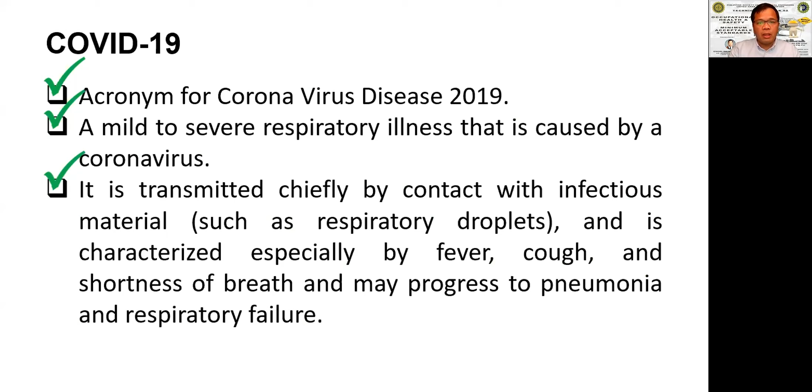I know everyone already knows what COVID-19 is, but as additional knowledge, I want to refresh our minds. COVID-19, an acronym for coronavirus disease 2019, is a mild to severe respiratory illness caused by coronavirus. It is transmitted chiefly by contact with infectious materials such as respiratory droplets in the air, and is characterized especially by fever, cough, and shortness of breath, and may progress to pneumonia and respiratory failure.

Infectious disease is a disease transferable to others by human beings or by animals, insects, foodstuffs, places, or other things and substances contaminated by microbes and toxins of the infectious disease. For this coronavirus, there is no study showing we can get it from animals, but for the sake of the definition, infectious disease is this. It is also known as communicable disease and contagious disease.

False: the new coronavirus only affects older people. The truth is, people of all ages can be infected by the new coronavirus, or nCoV 2019. Older people and people with pre-existing medical conditions such as asthma, diabetes, and heart disease appear to be more vulnerable.

Pandemic. What is pandemic? A worldwide spread of a new disease. An influenza pandemic occurs when a new influenza virus emerges and is spread around the world, and most people do not have immunity.

So currently, as of yesterday, we have 110.8 million coronavirus cases, and so far 2.4 million deaths, 85.7 million recovered. Currently the total infected patients is 22.6 million, with 22.5 million in mild condition, and serious and critical cases around 95,000.

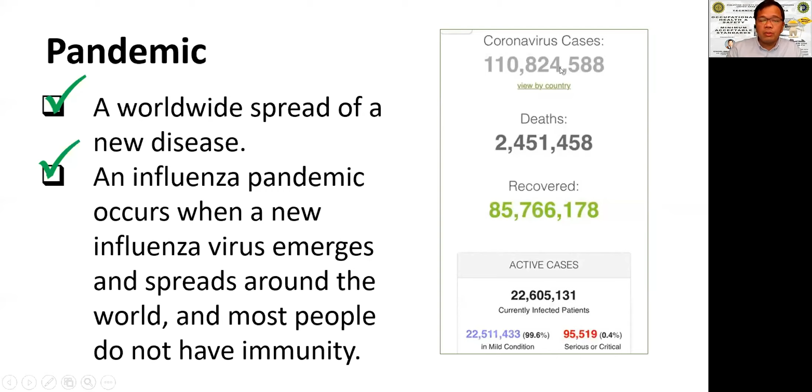So it is very important that we know this, because coronavirus is true, it's not a joke. Some of us may have already gotten coronavirus but don't know it because our immune system is very strong. So always be careful.

Prevention. What is prevention? The outright avoidance of adverse impact of hazards and related disasters. I got this from WHO. False: regularly rinsing your nose with saline helps prevent infection with the coronavirus. The truth is there is no evidence that regularly rinsing the nose with saline has protected people from infection with the coronavirus.

Self-quarantine: to refrain from any contact with other individuals for a period of time, such as 2 weeks, during the outbreak of a contagious disease, usually by remaining in one's home and limiting contact with family members.

Here's an example: Bob was exposed to coronavirus 19 on day 0. On day 5, Bob got tested for coronavirus 19 and the results came back negative. That means he was exposed from day 0 to 5, and got a negative result on the test. On day 8, thinking he did not have COVID-19, Bob went to work and a family gathering. He was contagious on days 8 and 9, 48 hours before symptoms, and exposed 22 people. On day 10, Bob became symptomatic and tested positive. So imagine, from day 0 to day 10, only then were symptoms seen.

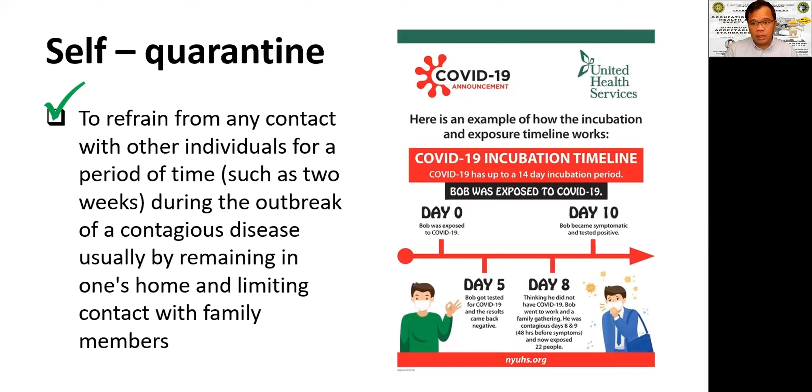Incubation: the incubation period of COVID-19 disease is between 2 to 14 days. This means that if a person remains well 14 days after contact with someone with confirmed coronavirus, they have not been infected. So after 14 days, if you did not get any symptoms, that means you are not infected.

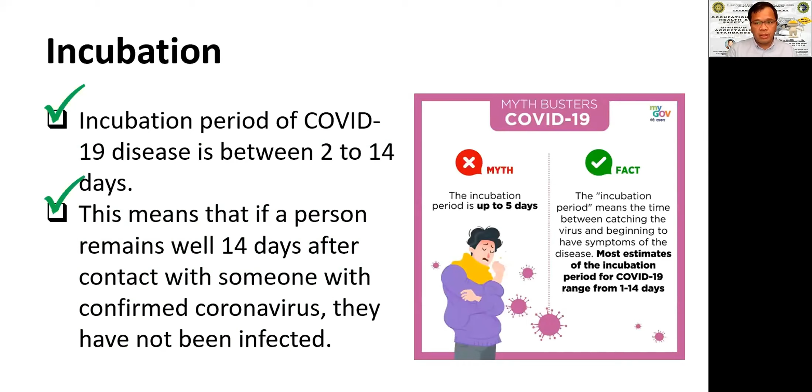False: the incubation period is up to 5 days. The truth is, the incubation period means the time between catching the virus and beginning to have symptoms of the disease. Most estimates of the incubation period for COVID-19 range from 1 to 14 days.

Transmission of the virus happens person to person, between people who are in close contact with one another within about 2 meters, through respiratory droplets from coughing, sneezing, or speaking. It enters our body by inhaling it or through our hands, since we touch our nose, mouth, and eyes - the points of entry. So if you protect your mouth and nose, you will not get the coronavirus. But sometimes we become too relaxed because we don't know if the person in front of us has coronavirus, and that's how we can get it.

So let us continue and check what else is in this presentation.

False: COVID-19 is an airborne disease. The truth is COVID-19 is not airborne and is mainly transmitted through droplets generated when an infected person coughs, sneezes, or speaks.

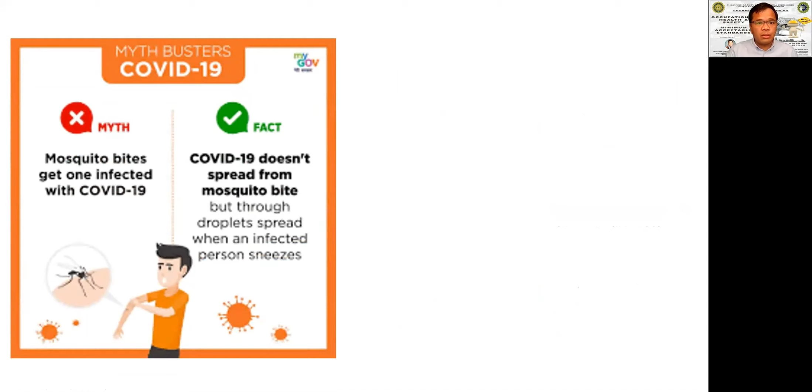False: mosquito bites get one infected with COVID-19. The truth is COVID-19 doesn't spread from mosquito bites, but through droplets spread when an infected person sneezes or speaks.

False: I can catch COVID-19 from my pet. The truth is, while there has been one instance of a dog being infected in Hong Kong, to date there is no evidence that a dog, cat, or any pet can transmit COVID-19.

The common symptoms of COVID-19: fever, around 99%, meaning almost 100% of patients have a fever. Fatigue, where you feel you don't have any energy, is present in 70% of cases.

A dry cough occurs in 59% of cases. Sometimes you feel coughing with a dry cough, meaning you don't have any phlegm inside.

Loss of appetite, wala kang ganong kumain, is at 40%. So you can still eat, but 40% of your appetite is lost.

Body aches, masakit ang buong katawan mo, para kang natrangkaso, is at 35%. You feel pagod na pagod ka, masakit ang katawan mo.

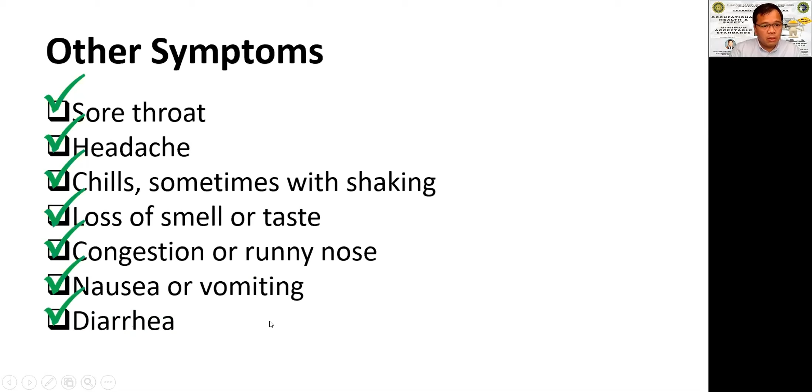Congestion or runny nose, meron ka rin ganyan. Nausea or vomiting and diarrhea - why do you have diarrhea? The coronavirus goes to your stomach, multiplies there, and you get diarrhea.

There are emergency symptoms as well, which I prepared: trouble of breathing. If you get trouble breathing after having the symptoms I mentioned earlier, that is an emergency symptom.

Constant pain or pressure in your chest, blue lips or face, sudden confusion - if you feel or find someone with these emergency symptoms, you need to call emergency services right away if you have one or more of these COVID-19 symptoms, and follow their advice.

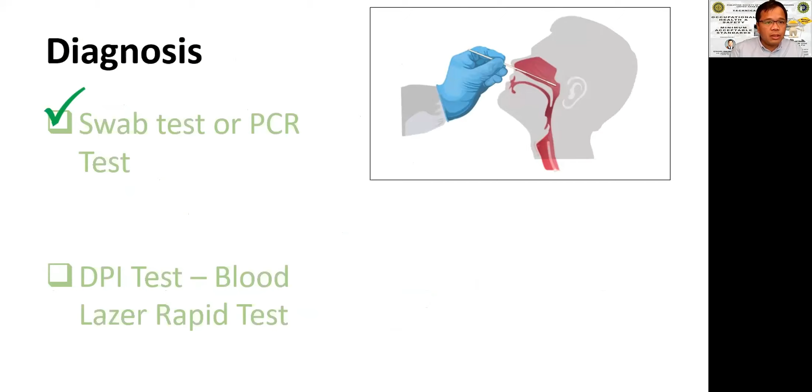Diagnosis for COVID-19 includes the swab test or PCR test, and the DPI test or blood laser rapid test. Is there anybody here who got one of these tests? I got all of these tests, so I have experience with them.

This is only the treatment that's available, but it's not 100% guarantee - even if you get vaccinated, you can still get COVID-19. Vaccinations available now are Pfizer, Moderna, Sputnik from Russia, Sinopharm from China, and AstraZeneca.

Ask your physician what is the suitable vaccine for you if you want to get vaccinated.

And of course, we have our immune system - it can fight all types of sickness. So we need good nutrition to boost our immune system.

Like with cancer, there is also treatment, but it's not 100% that you will heal. Radiation is only a treatment, but not a guarantee you will get rid of cancer cells in your body. It's only by chance - of course your immune system works together with treatment, and then there's a chance someone will survive.

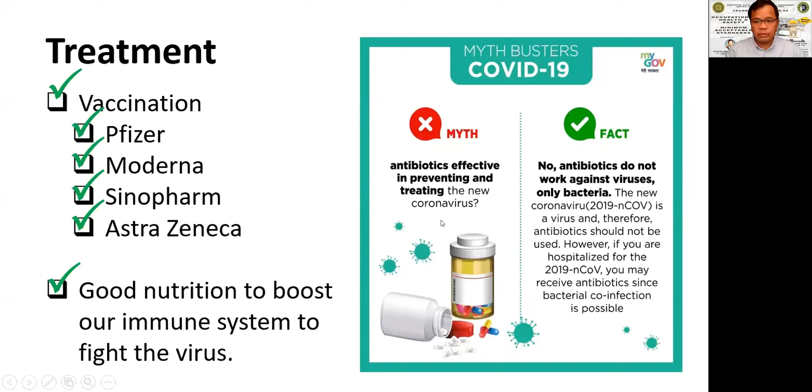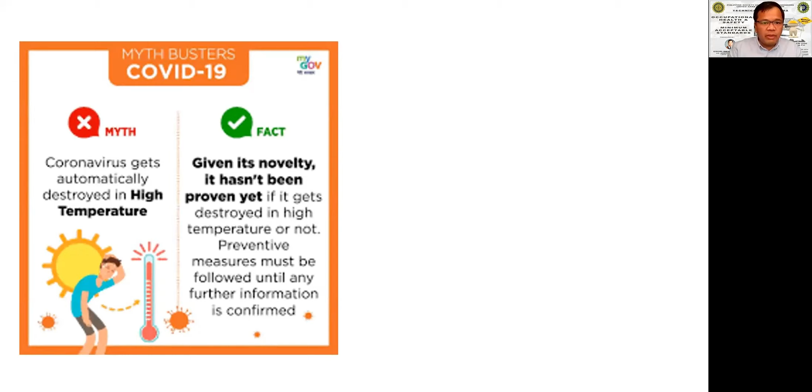Coronavirus gets automatically destroyed in high temperature. That is false. The truth is, given its novelty, it hasn't been proven yet if it gets destroyed in high temperature or not. Preventive measures must be followed until any further information is confirmed.

Preventions. Construction companies or any organizations should develop an emergency management plan for coronavirus and risk assessment. In the risk assessment, you discuss what hazards you will get, how you or your team will get the coronavirus, and then develop control measures based on that risk. If I get another chance to present here in the PSME, maybe I will make a separate risk assessment tutorial.

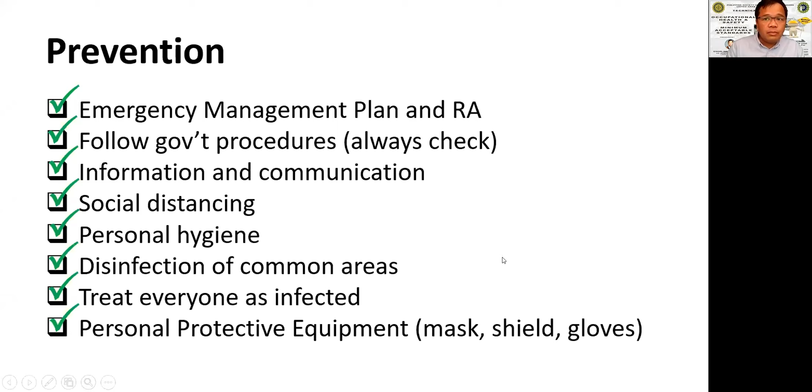Here are some of our practices that I want to highlight - some of our practices in the labor bus.

We follow government rules by reducing the capacity of the bus, making laborers alternate seats, holding meetings outside with a much smaller number of people, and in the mess hall - previously these tables had a capacity of around 10 persons, and we reduced it by more than 60%. We also implemented staggered duty - previously we had one shift only, and now we have 3 shifts: early shift, morning shift, and evening shift, to reduce the number of workers on site at any time.

We also developed isolation measures to control people outside during food distribution, and we now distribute food as packed lunches.

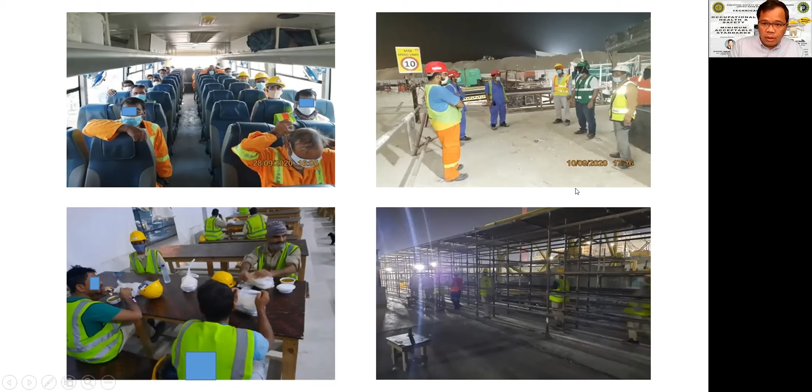So we transferred our meeting room outside, and we communicated to all the supervisors and engineers at site regarding the prevention of the virus. Very important is your participation in controlling the laborers. Imagine your laborers is not so...

How to prevent this, and sometimes they are ignoring it because they think no one sees, but only some people can see. If you compare the coronavirus to an accident, maybe they have fear about the accident, because if they saw a finger cut with blood, at least this is visible to them, but the coronavirus they cannot see. So it's very important that the supervisors and foremen participate and are engaged in controlling the labor.

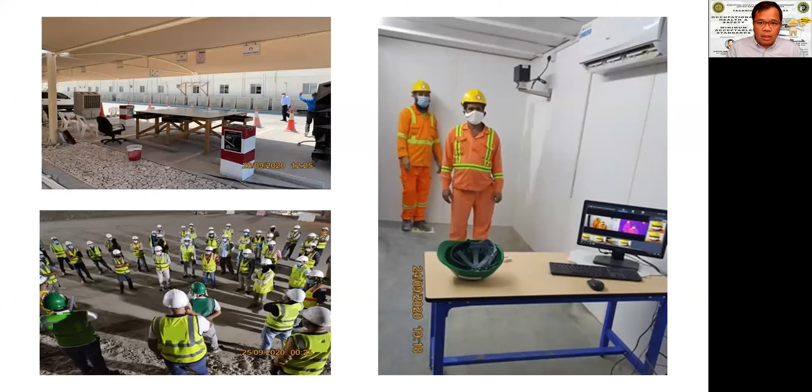So we provided thermal scanning. Every morning or every shift, before entry into the site, they pass through this thermal scanning, like a video thermal scanning.

We also provided isolation rooms. For those persons with high elevated temperature, we immediately isolated them in the isolation room so we can observe their condition, and then we call the emergency contact number for the government regarding this patient, if we have one.

So disinfection and cleaning of the mess hall regularly. If they are in the rest area, they can take rest but with a distance. Disinfection of their buses regularly, so we need to consider this, and disinfection of the offices and site projects.

Educating them to dispose of only their used surgical masks in the proper skips with proper signage, because once someone touches their contaminated PPE, they will also get coronavirus.

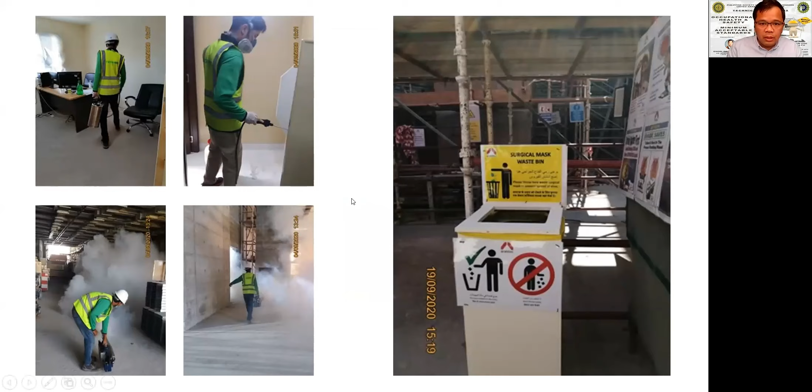So removing the finger scanning for time in and time out, and implementing facial recognition for time in and time out for the laborers and staff.

Provision of liquid disinfectant in common areas at the entrance, and provision of sufficient hand soap for the laborers' washing area, cleaning and disinfection of their mess hall and washroom.

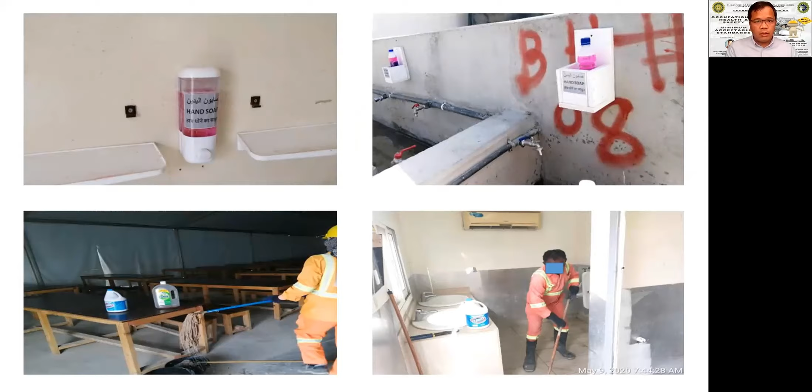Signages are one of our campaigns, so that everybody is reminded. This is a subliminal indoctrination - every day the workers see the signage, they put in their minds the proper procedures in preventing the coronavirus.

So we are placing these on the notice boards at the sites, and also on the common access areas for the laborers.

We must keep protecting each other. Stay alert, control the virus, save lives by washing hands, wearing a face mask, and social distancing. If we strictly follow these three things, I think we can fight together against the coronavirus.

Guys, I prepared some material coming from YouTube from the University of Sydney. I will play this one. Please watch this.

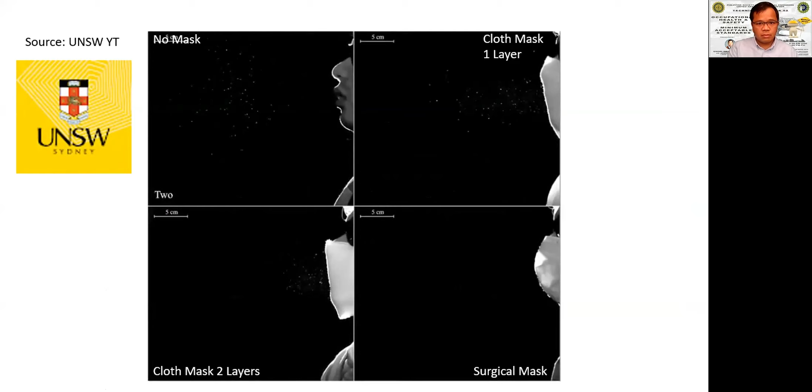As you can see, our respiratory droplets in the air - if you don't have a mask, or one layer of cloth, and two layers of cloth on the left down. And if you are wearing a surgical mask - I'm not promoting the surgical mask, you can also use N95 or any other type of mask - but this is some study that they have done.

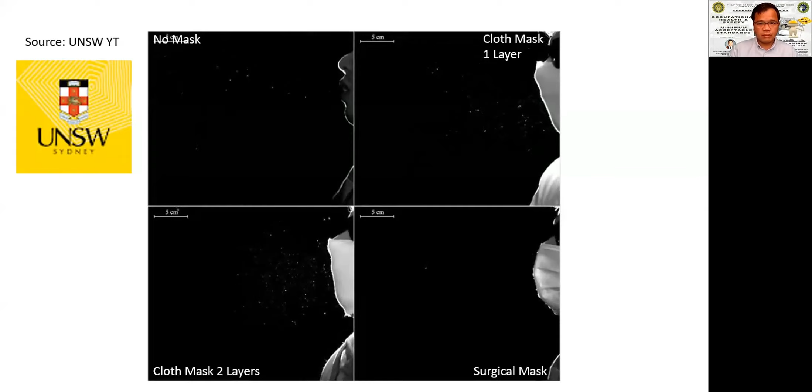When people are sneezing: no mask, cloth mask two layers, and with the surgical mask - this is how the behavior of our respiratory droplets in the air looks. So even when we are wearing a surgical mask, it's not 100% - we cannot contain all the respiratory droplets.

Another video showing how the coronavirus will spread through our hand.

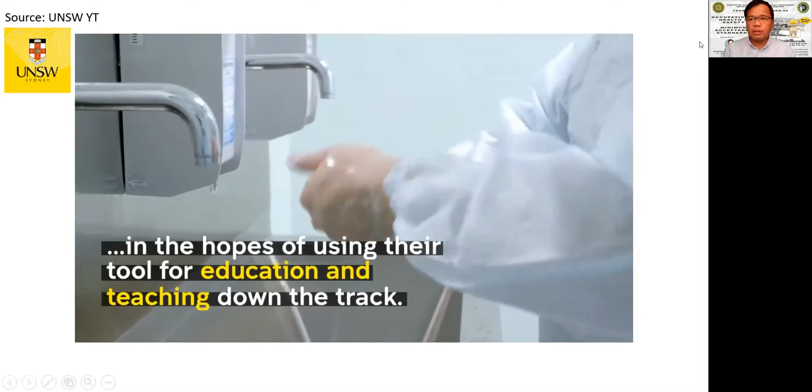There is always a saying, prevention is always better than cure. Guys, if you have questions for the first topic, please drop your questions there.

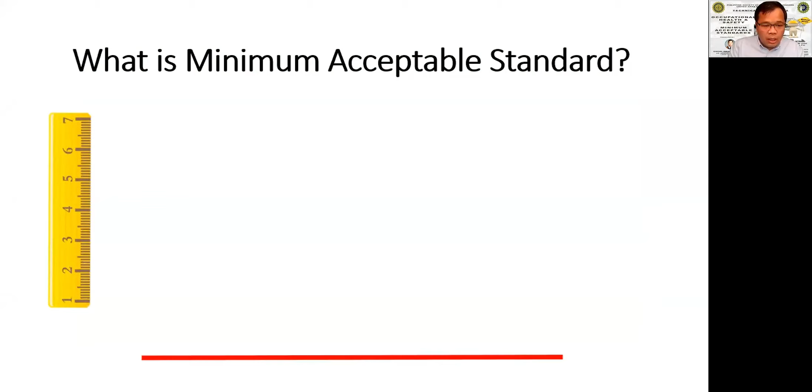Now I want to start immediately with the minimum acceptable standards. What is minimum acceptable standards? Let's say I have 3 lines here: the red color is non-compliance, the blue color line is legal requirements, and the green color line is best practice. Our minimum acceptable standard is somewhere between the legal requirements, above the legal requirements, up to best practice. When we are complying with the minimum acceptable standards, we are sure that we are complying with the legal requirements.

Either the minimum acceptable standard also can be the best practice. So if you are a main contractor, make sure that you are complying with the minimum acceptable standards. But mostly the consultants, consultant and client, they want the best practice. When we are aiming something, we need the best. And even if we did not hit the best, at least we are still complying with the legal requirement.

But for the sake of safety, because we are protecting the lives of our people, so there's no limit. So if you want the best practice, that is better. But on this tutorial, we will just discuss the minimum acceptable standards based on the empirical and local and international legislations.

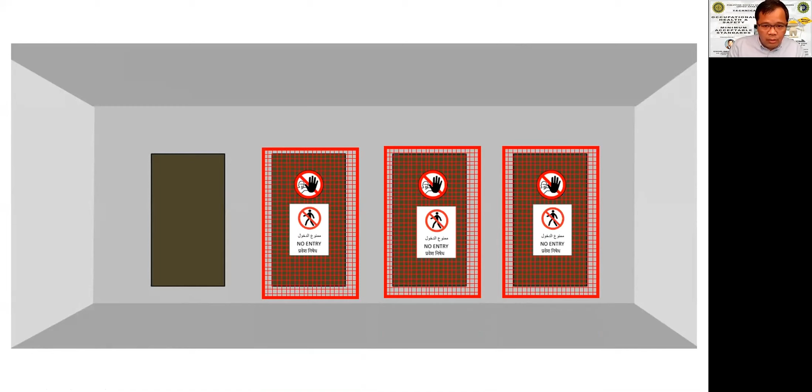So this is I make some sketch for the lift shaft on the building during construction. So this is some technique on how we can close the lift shafts, and if we open it, we need to make sure that we also close it after use.

Risk associated with the lift shaft opening must be managed by carrying out a suitable risk assessment and implementing the necessary control measures. So it's self-explanatory.

Lift shaft opening must be securely closed from floor level to ensure that no person or materials can fall into it. The enclosure shall be tamper-proof and will be installed upon striking of formworks, completion of the shaft walls at each floor level. So when we completed the shaft and we are striking the formworks, or even there is a formworks, we need to provide temporary protection.

This is to make sure that persons, workers around the lift shaft are protected. And there must be a permit system for removal. So when you are removing the cover protections, there should have a permit system. And all works to be undertaken inside the shaft must be controlled under the permit system only.

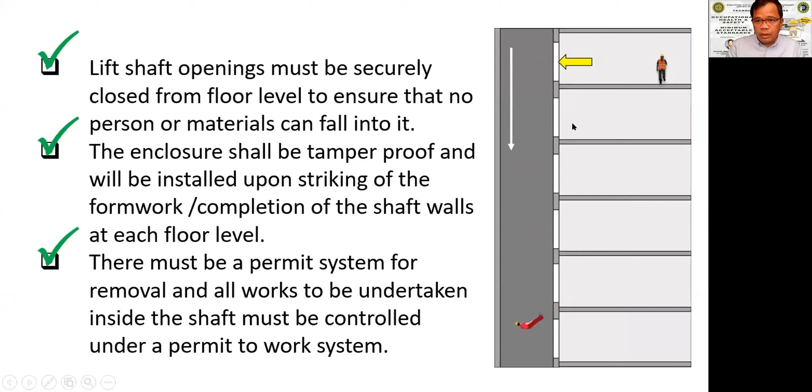Lighting must be installed at every opening level. The lift shaft must have adequate signage identifying the lift shaft area and inherent danger. So we need to put the signage that this is the lift shaft and what are the dangers on this lift shaft.

Where necessary, protection systems must be installed from fully boarded working platforms prior to installation of the lift car. So lift car, MEP, they know it. What is lift car? So before we started to install the lift car, make sure that there is a fully boarded platform on that shaft, on that particular level.

One trade must not work above another in a shaft, and there must be a minimum of 2 persons in a work group. So always buddy system, and it is not allowed to work on the same elevation. Example, in this animation, there's someone working on the top and someone also working or passing below. This is not acceptable. Only one group at a time.

That's why it's very important that when you are working on the lift shaft, you need to close all the points of entry. And if someone wants to work together with another group, they should make a risk assessment and make sure that the risks are fully controlled with full competent supervision.

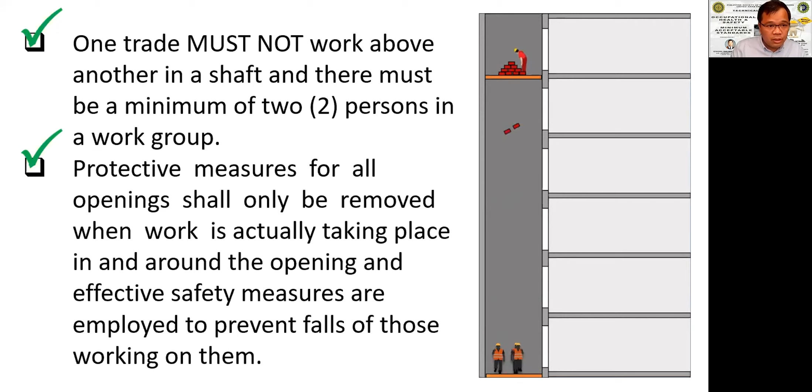During the installation of the lift equipment, the temporary protection is to remain in place until the permanent doors are installed and secured. For example, you are doing the job inside the shaft, installing the lifting equipment, and then leaving at the end of the shift. So when you are going to lunch break or other breaks, you need to make sure that when you leave that place, it is protected.

Because there are lots of people in the construction site that are not the same as us - they don't know how to analyze it. Maybe they will go inside and sleep during the break time, or hide there, and then that time they will get an accident.

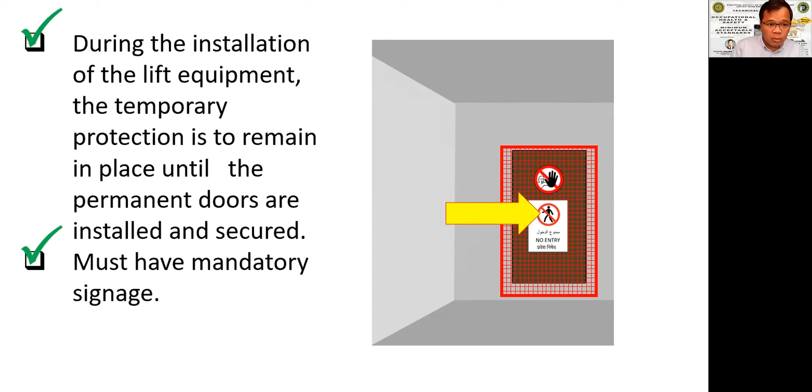There must have at least a mandatory signage. Mandatory signage should have 3 different languages: the local language of your host country, the English language, and the common language of the workers - for example Hindi, or in the Philippines, Tagalog. You need to identify what is the common language there and make sure it is included. In addition, you need to put some pictures or sketches so that even if they don't know how to read, they can understand the pictures. That is the minimum requirement about the signage and edge protection.

So risers and penetrations - what are those? MEP is very familiar with these risers and penetrations. These are openings where your MEP pipings go up through the floor levels of the buildings. So during construction, and during the installation of MEP, you need to make sure that those risers and penetrations are protected.

For example, here in the pictures, they installed steel mesh made of scraps welded together. They install it together with the concrete, and install concrete blocks on the perimeter of this opening. Also on the right side, you can see how the floor opening is protected. So when you have this, even some workers passing inside - even without you - they will go inside, but at least they cannot fall into the opening.

Even the small opening here, you need to provide protection, because some falling objects may fall through this small opening and hit persons below.

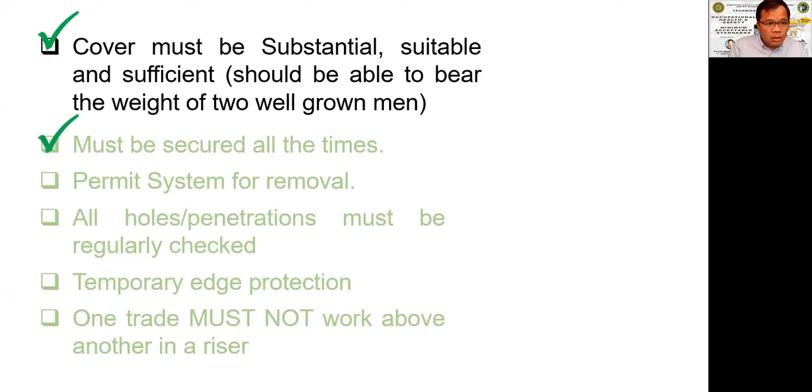The cover must be substantial, suitable, and sufficient. It should be able to bear the weight of 2 well-grown men. So at least your cover is designed to sustain the weight of 2 well-grown men, and must be secured at all times.

The cover or protection system must be under the permit system. That's why when you are working on the construction site, everything there is permit - because this is in order to make sure that we will not forget something. Because when you remove something, at least you provide another control. That is very important.

All holes and penetrations must be regularly checked - temporary edge protections. So you should provide temporary edge protections for penetrations as well, not only for the lift shafts.

One trade must not work above another in a riser. So in the floor opening, you need to make sure that when you are working on the top, the level below your work area is isolated.

If you can provide a watchman to restrict entry or passing by that location, it is better. But sometimes human control has its limitations - for example, if your watchman goes to the toilet, then your human control is not there. So it's always better to have hard barricades and signages, plus the watchman, as the minimum acceptable standard.

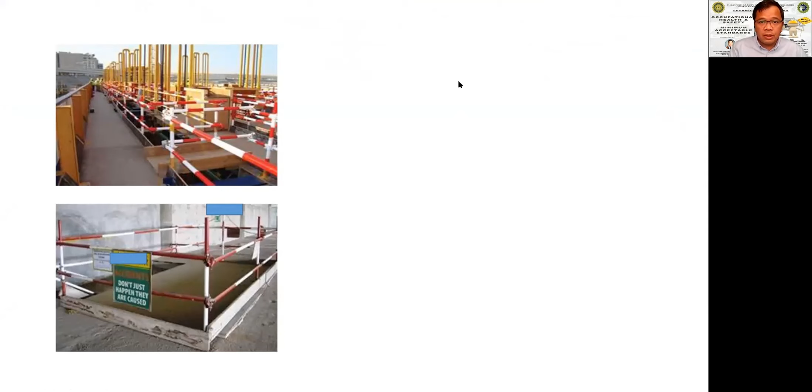So this is some example of good practice on the edge protections, on the opening and the edge of the buildings, on the opening and the floors. Some example of minimum acceptable standards on the edge of the buildings.

And the top rails, when you are installing the top rail, it should be 0.91 meters to 1.15 meters. And when you are installing the mid rail, it should be 0.45 meter to 0.60 meters.

This dimension is developed based on the human height. Okay, human height, toe boards. Minimum height is 0.15 meters or 150 millimeters.

And the edge protection should be installed 0.5 meter setback from the leading edge of the building. And the vertical member of this edge protection, we call it the post or edge protection post.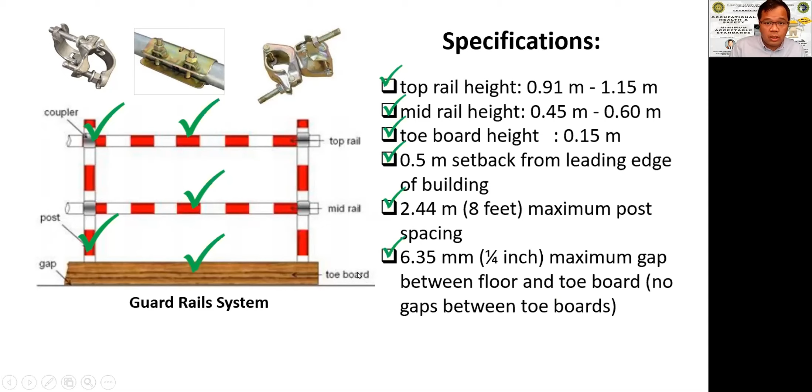Okay, this is minimum acceptable standards. If you want to provide some green or mesh net, it's better - you increase the height by 3 or 4 layers of horizontal pipes and provide the green mesh. That is better, we call it best practice. What I'm trying to discuss here is only the minimum acceptable standards.

So a guardrail system must be capable of withstanding without failure a force of at least 200 pounds, 890 Newton or 91 kilogram force, applied in a downward or outward direction within 2 inches (5 centimeters) of the top edge at any point along the top rails. So your guardrail or edge protection should be designed to resist this force.

This is as per OSHA standards. So for example, on this sketch, at any point on these railings you need to make sure that 200 pounds can be resisted, 91 kilogram force. I think they based this on the weight of people - 100 kilograms or 91 kilograms.

It must be extended around any uncovered opening or leading edges. Must be substantial, suitable, and sufficient. These terms should be complied with at all times - substantial, suitable, and sufficient, meaning very safe. There should be no chance that your edge protection will collapse by itself or by a certain minimum force.

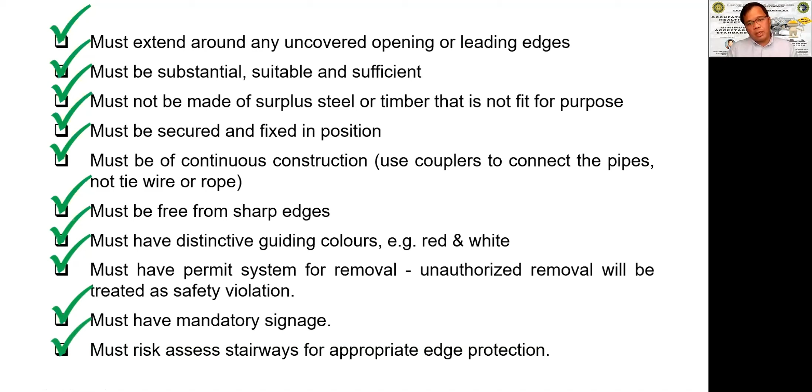Must have a permit system for removal. Unauthorized removal will be treated as a safety violation. Must have mandatory signage as a minimum acceptable standard. If you have edge protection but no signage, you are not complying with the minimum acceptable standard, and you will still get fines from the authority if something unacceptable happens. You must also risk assess stairways - for the staircase or stairways, you should have appropriate edge protections as well.

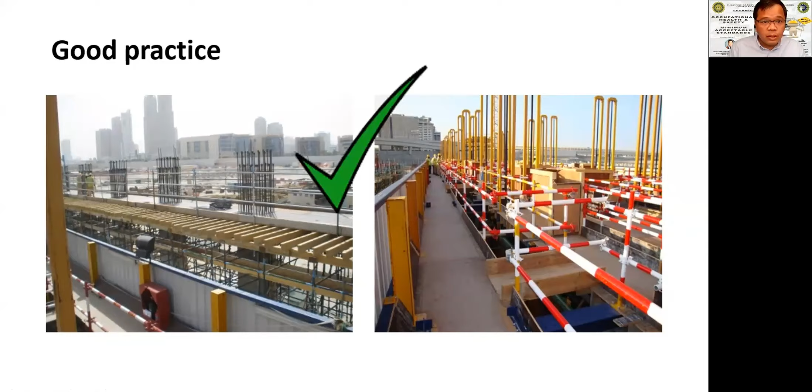Okay guys, we have completed housekeeping. Let's proceed to temporary electricity supply. This is also MEP works.

Just hang on a minute, I just want to drink a little bit of water.

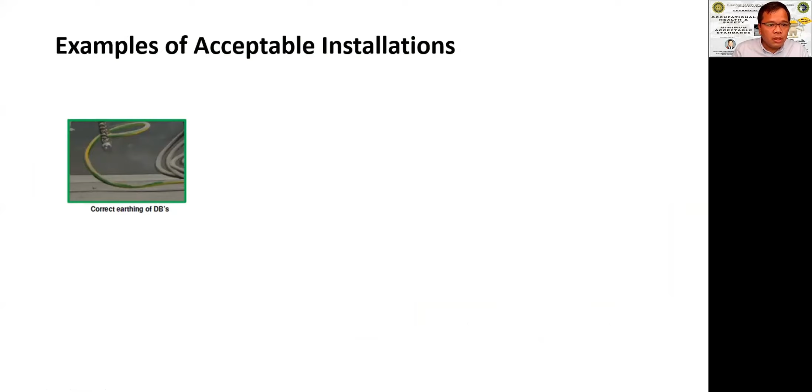Examples of acceptable installations: correct earthing of the DBs, correct cable glands, which protect our cable from damage from sharp edges, and additional control of your distribution boards with provision of padlocks so you can prevent unauthorized access.

Guys, it's very strict here, especially in the Middle East. You are not allowed to touch any electrical equipment if you are not competent. When we say competent about electricity, you should be trained. You should have education about electricity, not only training, like for example a master electrician, and you should have experience.

For example, one worker wants power and cannot find any electrician nearby, and doesn't know the number to call. So what will they do? They will open the distribution board and insert their cable by themselves. When opening distribution boards, they are prone to accidents.

Fluorescent lights: we can use fluorescent lighting with a diffuser on the aisles of our project. Make sure all the cables are properly elevated and installed, and there is full discrimination of the circuits, so there's no twisting and everything is well organized and tight.

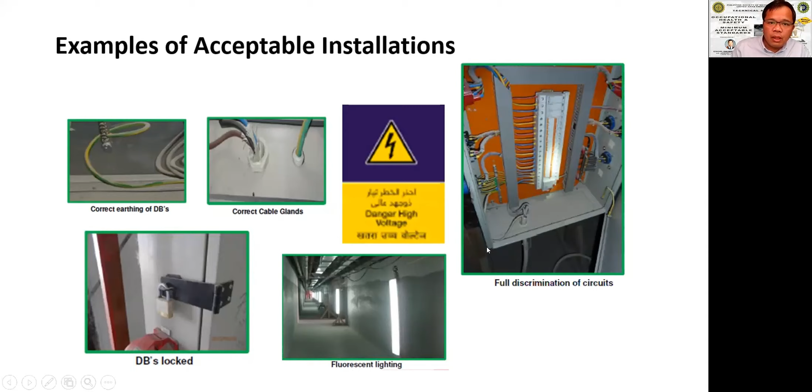And as I said before, even if you provide everything, if you don't have signage, that's a problem. This is a minimum acceptable standard, even in the law, that you should always provide signage in at least 3 different languages, with pictures or sketches.

So temporary electrical installation must be designed. Just a minute, I just want to hide this. It must be approved by an electrical engineer, installed by a competent electrician, and inspected by a competent person once every 3 months.

So this is design approved by an electrical engineer, to avoid overloading.

I know MEP knows what is approved electrically, but why do we need the design? Because every time we have new equipment that needs to connect to our temporary electrical system, we need to coordinate with the electrical engineer, so he can evaluate if the new load can be allowed to connect to the existing electrical system.

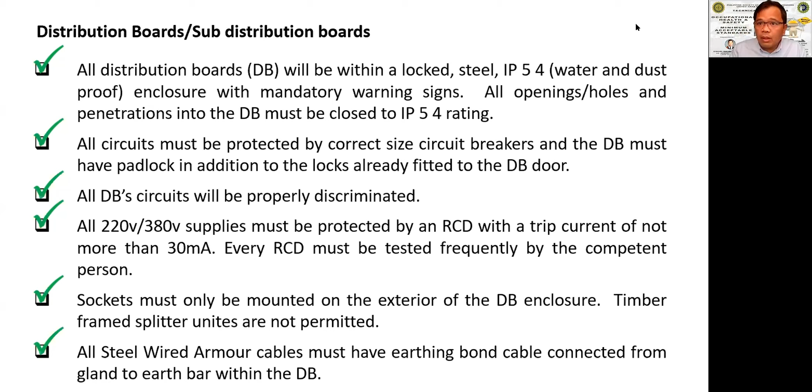Cable and flexes: all cables shall be terminated using proprietary glands. Where necessary, separate earth conductors shall be installed. So even your cables should have an earth conductor.

All extension leads shall be formed using 3-core double insulated flex. Flexes must be kept off the floor and secured by non-conductive cable ties where required. All earths will be terminated properly to ensure the safety of the system - if there is a loose connection, it is always making sparks, and if there are sparks, it creates a fire.

Joints must be made using outdoor type plugs and sockets, no twisted or taped joints. Outdoor type plugs or sockets are required because during construction there are so many things happening on site - there is water, there is temperature, because the site is still exposed to all types of weather. So we need to make sure we are using proper outdoor plugs, sockets, and proprietary junction boxes.

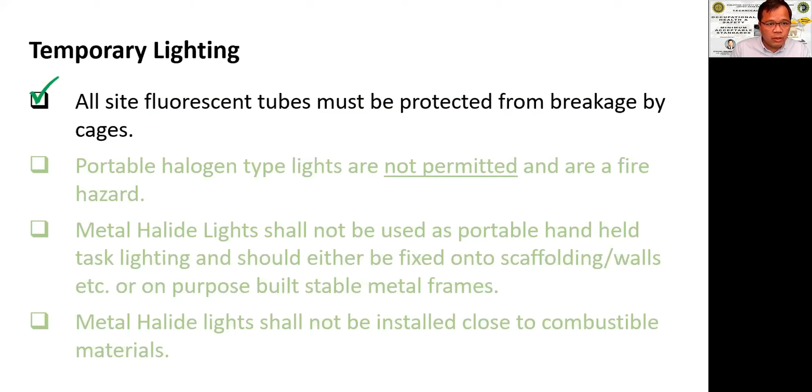Temporary lighting: all site fluorescent tubes must be protected from breakage by a cage, so we need to provide a cage if we are using fluorescent tubes. Portable halogen type lights are not permitted and are a fire hazard - halogen is not permitted.

Metal halide lights shall not be used as portable handheld task lighting. Task lighting is different from metal halide lights. Metal halide lights should be installed only permanently on fixed locations to give lighting to our work area or aisles. But task lighting that we can move everywhere should be provided.

Metal halide lights shall not be installed close to combustible materials because they emit heat as well. Now they are providing LED lights, but I have one incident even with LED lights. You know what workers did? They removed the lights from the fixed location and used them as task lighting. Then after completing their task and shift, they placed it on the platform and shut down the DB. The issue is when the new shift arrives, they open the system and the light is on. Due to the heat emitted by the LED lights, the planks or platforms burn. Fortunately the planks were treated fire rated, but it still smokes, which you can detect from far distance. But if it's not treated fire rated, then it's a big disaster of fire. So always make sure that all lights are away from combustible materials.

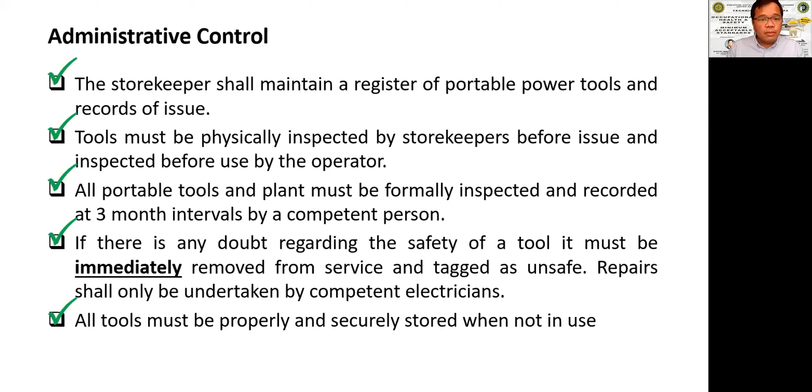Plug and flex: all tools must have an industrial plug fitted and be the correct color for the voltage. Electrical engineers know the correct color for the voltage. For example, on site, yellow flex indicates 110 volts, so you can easily see he is using 110 volts. You can also see the power tool's yellow color socket, confirming it's 110 volts connected into the 110 volt supply. But sometimes workers make their own remedy.

They are removing the lock on the industrial type plug so that they can insert their 110 volt power tools into the 220 volt supply. This is an unsafe act and not acceptable. The plug and cable shall be in good condition with cable securely terminated.

Only one flex for each plug socket, no doubling up. As I discussed before, only one plug, one socket. Cables and flexes must be kept off the ground and out of the way during use.

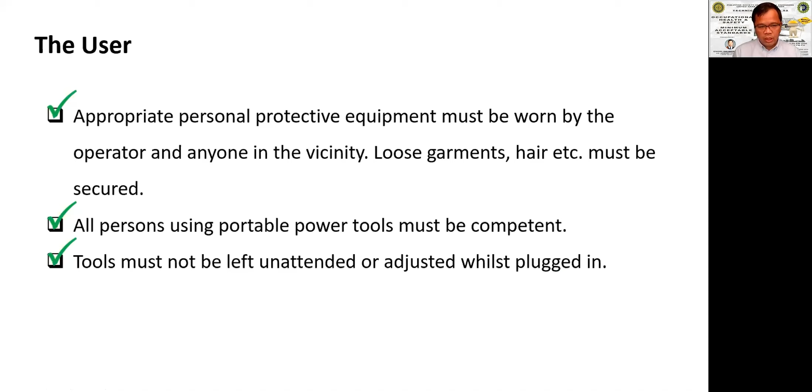Tools must not be left unattended or adjusted whilst plugged in. Sometimes workers go for break and forget to remove the tools from the sockets and put them in the toolbox properly. This is unacceptable, because someone unauthorized could use it while they were away, and those unauthorized persons could get into an accident.

The workpiece must be secured properly in a vise, workbench, or other similar device wherever possible, or positioned so as to prevent movement. When you are cutting something, at least you should have proper workstations, like table stations. Workers sometimes say, 'sir, this will only take one minute, I'm just cutting this' as an excuse, but I will tell you, accidents happen in less than one minute.

Any accident happens in less than one minute, so don't allow that. I will do it properly all the time. Your workstations should be designed to carry out your job safely.

If you are cutting bolts for ducting materials, you should do it properly in a vise or workbench or other similar device wherever possible.

The environment as well. Electrical tools must not be used in hazardous locations, like confined spaces, unless designed for it, and must be kept dry. Inside a confined space, you cannot use all types of electrical tools. You need to consult the supplier of your tools if it's suitable to work inside a confined space, because there may be flammable gases, and your power tools will create sparks.

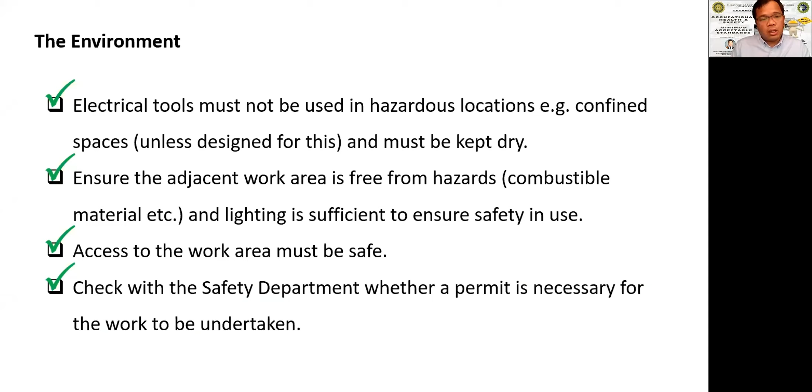Sometimes workers doing grinding remove the PPE. That is the attitude - there's no self-discipline. And then it's too late - they get into an accident before they realize they are not complying. They have the equipment but they're not using it. As supervisors and engineers, we need to make sure all our people are properly using the safety provisions we provided to them.

If they're not using it, we can ask them why and listen to them. They might say, 'Boss, I cannot work properly.' So this is the time you need to analyze if you can change the system or the procedure, so that your workers are 100% safe.

Minimum requirements: more onerous legal or contractual requirements shall always take precedence. If you think your minimum acceptable standard is below the legal requirements of the host country you are working in, increase it. This minimum acceptable standard is only a guide, so you can still bring it up to best practice to make sure you eliminate the unsafe conditions and unsafe acts that trigger accidents on site.

Higher standards shall be adopted wherever practicable. So if it is practicable, adopt the higher standard rather than just the minimum acceptable standard.

Gas cylinders are a convenient way to transport stored gas under pressure. These gases are used mainly on a construction site for typical operations like soldering, welding, and flame cutting. It's very convenient to use.

The main hazards are impact from the blast of a cylinder, explosion or rapid release of the compressed gas, impact from parts of the cylinder or valves that fail, or flying debris like shrapnel. When cylinders explode, they generate shrapnel or flying debris that can hit you, or fire that can burn anyone nearby.

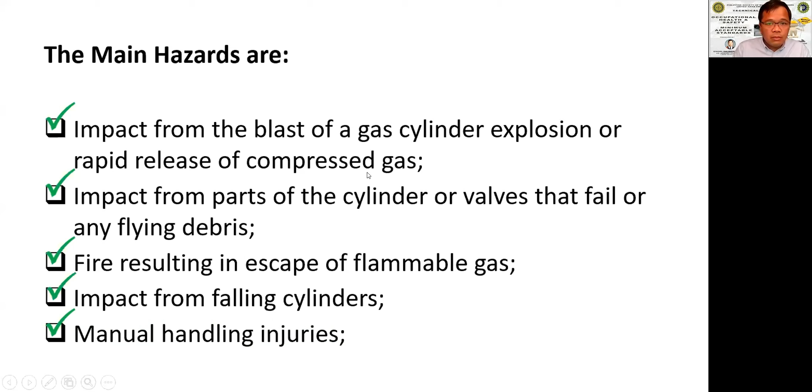There are so many inherent hazards in cylinder handling. These are only the main hazards that you can identify in your risk assessment, and you need to control them at all times. To reduce the risk of failure, you need to know and act on the following precautions.

During transportation, handling and use, transportation of the cylinder must be in a purpose-built gas trolley or lifting cage, and all cylinders must be secured by chains. If you are MEP, you are familiar with the trolley. I will show some pictures of the trolley later.

No one must lift a cylinder by the valves using a web sling or chain. You cannot lift it by crane or web sling. Never manually spin the cylinder to transport it from one place to another over a short distance. This may cause the cylinder to fall and trip. Imagine when your cylinder falls, it will hit the valve or something, and it will explode.

Cylinders must never be dragged or rolled. Transportation of the cylinder must be in a purpose-built gas trolley only, or lifting cage, and all cylinders must be secured by a chain. Gas cylinders must not be raised or lowered on the forks of a lift truck.

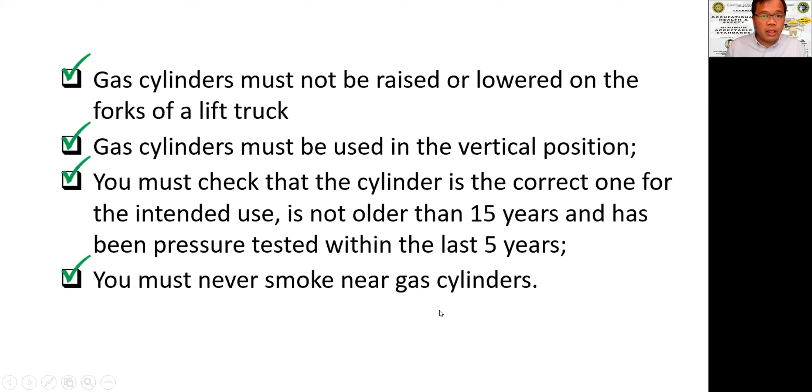You must never smoke near gas cylinders. Correct, very clear. Storage: cylinders must be stored out of direct sunlight to prevent potential rupture due to heat explosion. If there is extreme heat weather, the gas inside the cylinders will expand more, and the pressure will increase, and it will rupture the cylinder shells.

The storage area must have a level concrete base, and the walls and roof to be constructed of non-combustible materials, and must not be in a building used for other purposes. Ventilation must be available to keep cylinders cool. Warning signs must be placed in prominent positions to warn others in the vicinity.

So this is the storage. It must be on a level concrete base, and must not be in a building used for other purposes. If you are storing cylinders, you need to build storage intended only for compressed gas cylinders.

And of course, you should have ventilation so that the temperature is controlled on that location. As a minimum, warning signs should be placed and visible, and the signage should have a minimum of 3 different languages with photographs on it, so that even workers who are not well educated and don't know how to read can understand that this location is a restricted area and know what the hazards are on that location.

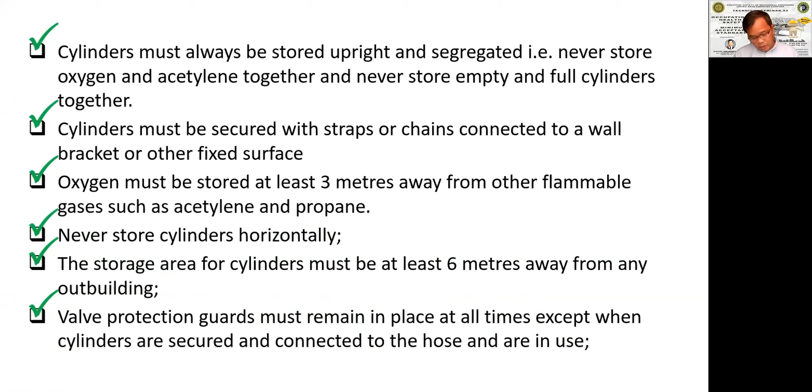So when you are planning to bring cylinders, because you have so many jobs, steel jobs, you need to make proper planning on how you will store your cylinders. When installing and storing the cylinders, make sure the area is suitable and safe, with no underground utilities like power lines, because if there is an earth leakage on that location, it will contribute heat to your cylinders, and if you have leaks on your cylinders, it will explode.

Fuel hose. Fuel hoses must be inspected for signs of cracks or perishing and removed immediately if found. You can see outside so many hoses - when you bend it, there are already cracks.

No, it's not brittle because it's carrying the pressure inside. This inspection must be carried out daily before use. Fuel hoses must not be used if there is no flashback arrestor fitted at the regulator and torch end.

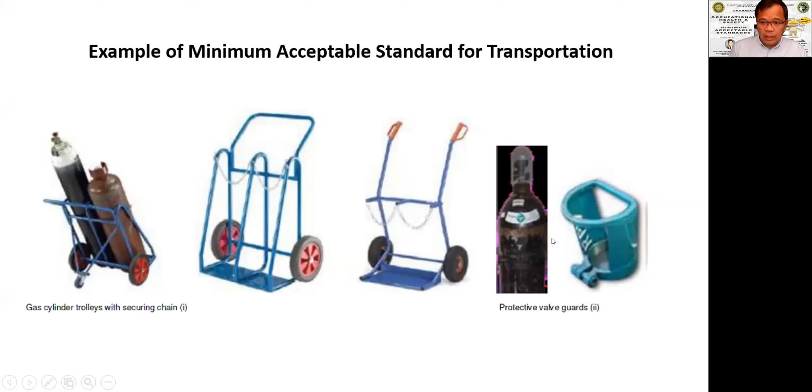So we have completed the compressed gas cylinders. Now we will proceed to the ladders and step ladders. Is there any questions so far? Later on I will answer, so please collect the questions. Minimum requirements for the ladder and step ladder.

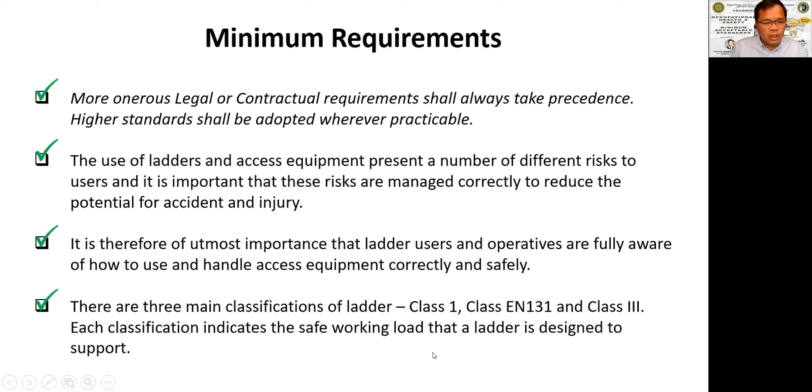The three main classifications of ladder are Class 1, Class EN or European 131, and Class 3. This classification indicates the safe working load that a ladder is designed to support. The table shows the three main ladder classifications.

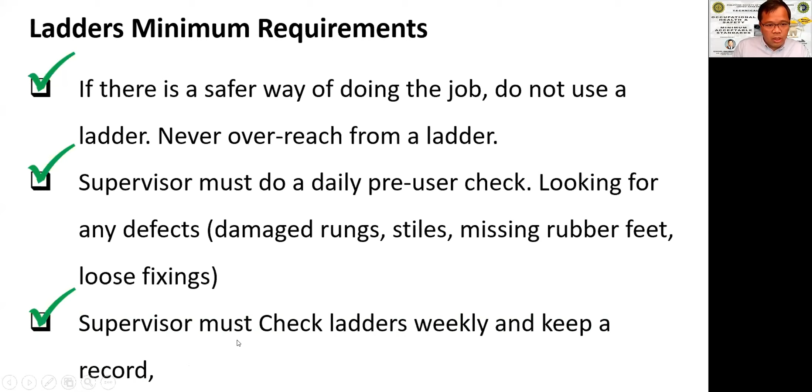Supervisors must check ladders weekly and keep a record. It is always very important that you have a record of checking the ladders. This will save yourself in the future if something happens, for investigation purposes, and also for audit inspections. So you should have this record, and of course, as supervisor, you should know how to inspect the ladder properly.

Supervisor must give workers instruction on how to use the ladder safely and make sure they are followed. You give instruction, but you did not monitor them. So how do you make sure that they will not get an accident using the ladder? You need to make sure that you are supervising them, that they are following your instruction on how to use the ladder safely. Mostly accidents happen on site due to unsafe acts, the behavior, the attitude of the workers. So you need to control those bad attitudes.

Sir, I'm using this ladder 10 years now, you don't need to teach me, okay guys. But when you observe how he is using the ladder, it's very unsafe. So that means he has 10 years working experience with the ladder, but it's not correct experience. As supervisor, you need to check, you need to correct this. Don't trust everything to your labor, okay.

Supervisor must check floor surfaces, area level, firm and clean. Surface is very important because your ladder may slip and your worker may fall. Any ladders in poor condition must be removed from the site and tagged unsafe to use.

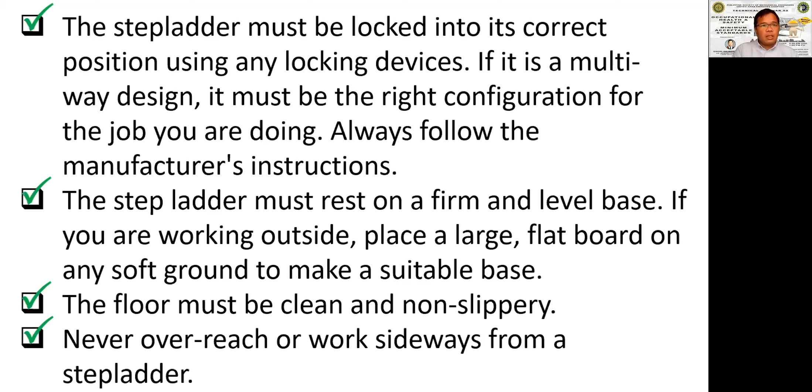Make sure all the steps of your ladder are clear from oils so it will not be slippery. And make sure you have anti-slip safety shoes fit for your ladder. There is rubber with spikes on it so that it will not slip on any surface.

You need to make sure this is working properly. Most of the time it gets damaged, and some workers even remove it. So you need to make sure there is proper slip-resistant safety shoes on the feet of your ladder.

When you are climbing the ladder, make sure your workers, or yourself, maintain 3 points of contact on the ladder. When installing the straight ladder, the inclination should be 1:4 - 1 meter horizontal and 4 vertical. It depends on the length of the ladder, and the ladder should extend at least 1 meter above the roof or surface, because this will serve as a handle when going in and out of the ladder.

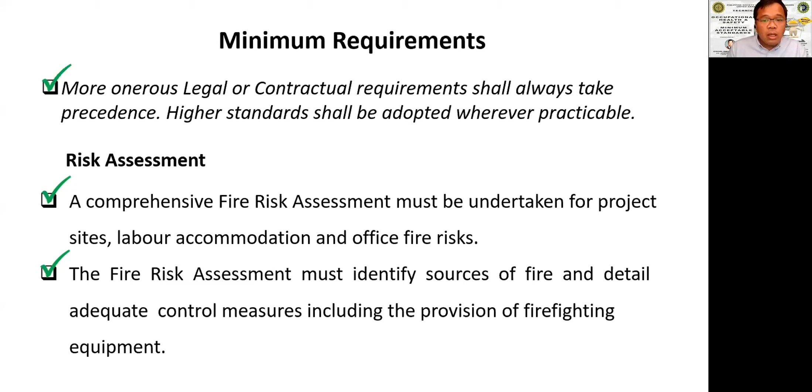As in-charge persons, we need to make sure during the fire risk assessment, we identify all those sources and then provide control measures, and make sure that you are implementing and monitoring those control measures. If you are preparing the method statement, you need to consider the fire risk assessment as well.

It's always required that you identify all the hazards before you start the actual job. Location of the equipment - fire extinguishers shall be distributed in easily accessible locations, and the maximum travel distance from any point of the protected area to the nearest fire extinguisher shall not exceed 15 meters.

Wherever practicable, hose reels must be installed in uniform position near exits or on staircase landings at floor levels. Hose reels not fitted in recesses must be wall mounted in such a manner that they do not form an obstruction to means of escape routes.

As a project manager, review your emergency response procedures so that you can see what is the time that you will install your temporary firefighting provisions. But remember, the fire extinguishers should be there before the start of the job, so it should be sufficient, and make sure that you have a 15 meters maximum travel distance for each point of the site so that you can reach the fire extinguishers.

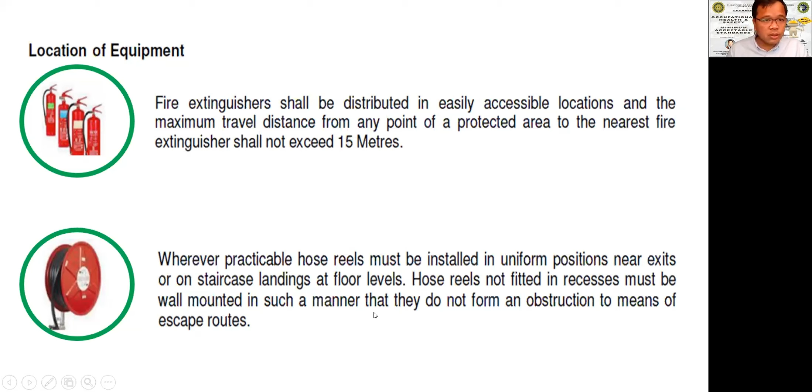Dry risers must be installed at the stairs of each level when the building height exceeds 18 meters. So there is already a provision here that when your building exceeds 18 meters, dry risers should be installed and must be equipped with controllable outlets on each level to be used by connecting fire hoses or hose reels. These risers must be equipped with the correct inlet at ground level for water supply by civil defense from outside the buildings.

Wet risers must be installed when the building height exceeds 30 meters. There must be a sufficient pressurized water supply in accordance with its design and a competent organization authorized by the Civil Defense Administration. So, dry risers, wet risers.

Automatic sprinkler systems must be installed in all basement areas of the buildings which are to be used during the project as storage areas. So if you are using your basement as storage areas, you should have automatic sprinkler systems. That's why when you are bringing materials, like for example lift car accessories materials, because the basement is already completed, you will bring your materials to install your MEP works. Before you bring your material, you need to check that there is an automatic sprinkler system.

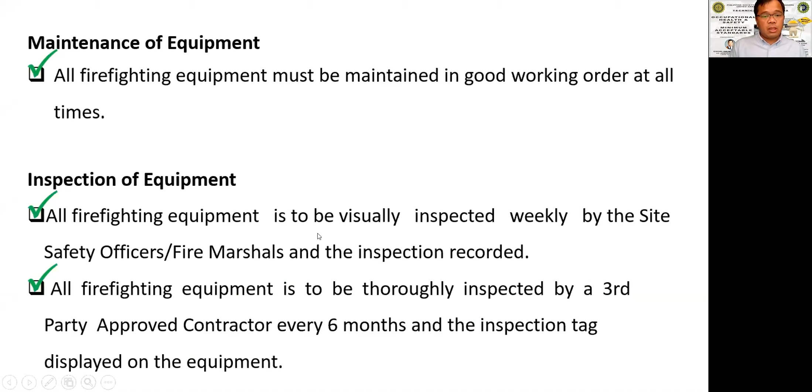Okay guys, any questions so far? This is only highlights for the minimum acceptable standards. I will speak with our professor, Mr. Ryan, Engineer Ryan Ben. We are listening - there are some questions, but I think we need to answer that. There are a few questions right now coming in our chat box.

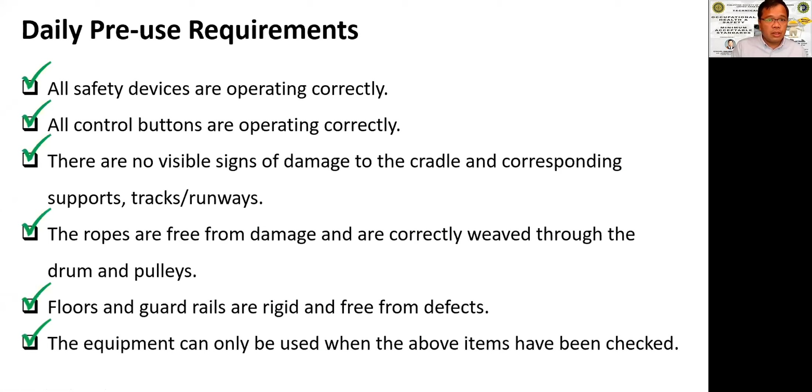Okay, when using the suspended platform, you must ensure pre-use requirements: the equipment shall only be altered and dismantled by competent persons - always mention competent persons, right? Every time the equipment is altered, dismantled, or relocated, it must be third-party certified. The safe working load must not be exceeded.

Again, tools and equipment are secured appropriately. Tool lanyards must be utilized. If you are using tools like a spanner, it should be equipped with tool lanyards. This is to prevent accidental falling of the tools below.

The occupants of the building are aware that they should not be opening windows while the cradle is in use, and no other works must be carried out above the cradle. So who are the occupants of the building during construction? We are the occupants. But if you are conducting maintenance only, then the building owner should be coordinated about your procedures.

The person operating the cradle must know the emergency lowering device and how to use it. If malfunctions occur, work is stopped immediately and reported to the concerned person. An appropriate rescue from height plan must be in place.

When weather conditions deteriorate, wind, rain, etc., work is stopped immediately. Access to the area below where cradles are working must be properly barricaded and signposted to prevent entry of unauthorized personnel.

personnel. How many hours do we have now? Host? So we almost completed.

All persons in the cradle must wear a harness with a lanyard attached to the independent safety line at all times.

The same things apply to the electrical distribution board.

If counterweight style cradle support arms are being utilized, the counterweight plates must be secured and tied with wire to ensure they cannot be removed. The counterweights must be secured by installing jack props between the tops of the counterweights and soffit, or bolting tie support through the counterweight base frames.

I will show you pictures of the counterweight.

I-beam type cradle support arms must be bolted on the floor slab with a supplier approved fastening system. All bolts must be chemically anchored.

There is a chemical that they are putting on the bolts.

Cradles can only be entered or exited from the ground floor or purpose-built landing platforms. So don't try to enter the cradles through the window. Only authorized access is from the ground floor, or if you have a landing platform.

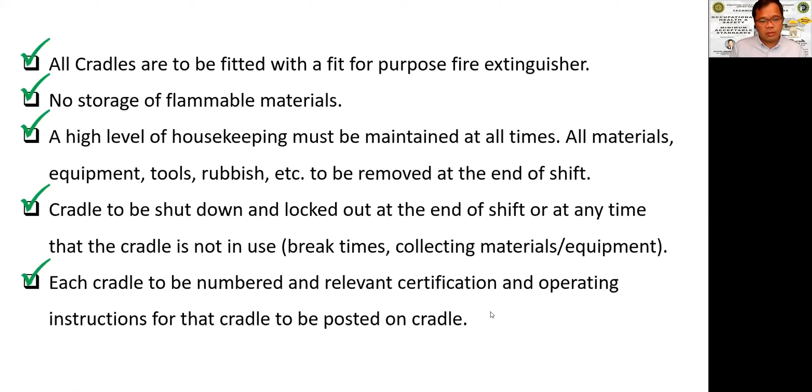Each cradle is to be numbered, and relevant certification and operating instructions for the cradle must be posted. This information is very important. So if you have 20 cradles on your project, you need to number all of them and make sure that all individual certification is available, including the operating instructions.

Signages should be there with your certification and how to use the cradles, and make sure all the people or operators using the cradles are trained, certified, experienced, and competent.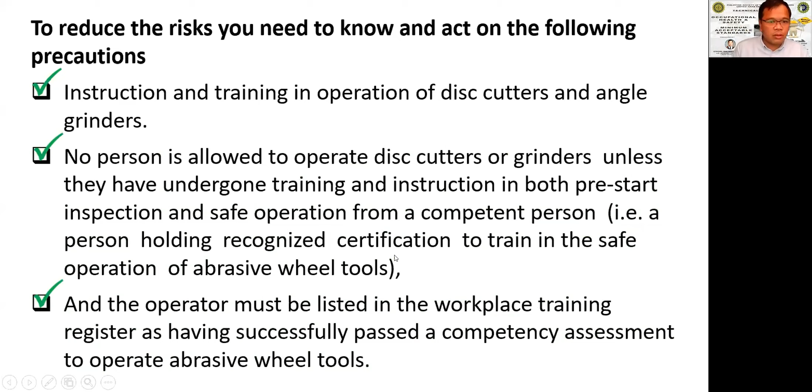For pre-start inspection, the operator must check the disc guard is in place, secure, and free from damage. Disc guard means the machine guard. The power cable, industrial plug, and electrical connections must be free from breaks and exposed wires.

The outer casing of the tool must be free from cracks. All securing screws must be in place and not loose. It is not allowed to secure them with wires.

All handles and grips must be intact, fitted, and not loose. The tools must have an easily accessible and efficient starting and stopping device.

At least there is now an emergency stopping device required in the market. Now they are providing all tools with a stopping device.

The disc must be secured with the correct flange and locking nut for the cutter and grinder. The RPM rating of the disc must be higher than the RPM rating for the cutter and grinder.

The rating of the disc should always be higher than the RPM of the grinder machine. Because if the disc has a lower RPM rating, it will burst when the machine is running.

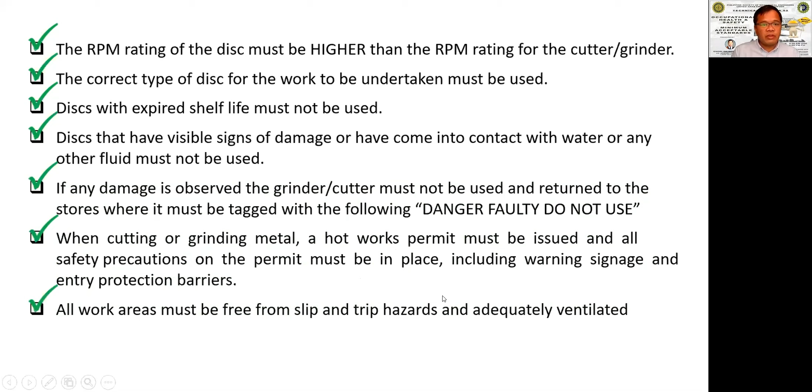When cutting or grinding metal, a hot works permit must be issued, and all safety precautions on the permit must be in place, including warning signage and entry protection barriers. All work areas must be free from slip and trip hazards and adequately ventilated.

Handling and use: you must use the right tool for the right job, of course. That's why proper planning is very important. You must not use a grinding disc for cutting, or a cutting disc for grinding.

Very important: when discs are worn and performance is affected due to the reduced disc diameter, they must be discarded. The discarded disc must not be used in a smaller grinder or cutter.

Why do we need to avoid using the discarded disc? Because there may be a different RPM, as I mentioned. Remember, so we need to check, but it's not authorized to use that.

You must not use excessive force when cutting, as this reduces the service life of the tools and may cause the disc to shatter. Two hands must always be used when operating grinder cutting tools, but do not cover any air vent, there is an air vent on the cutting disc to maintain the temperature of the machine.

When using disc cutting tools, you must always operate with the safety guard between your body and the disc, and with the disc rotating away from you.

This refers to the machine guards as well. You should always stay behind the machine guards and not expose your body to the rotating disc.

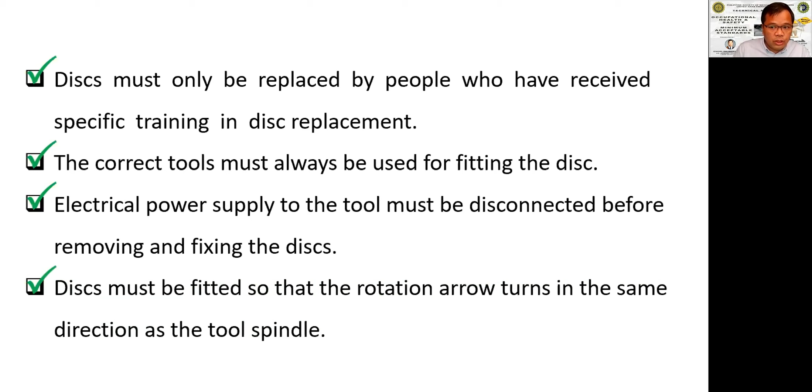Appropriate eye and face protection must be used. Gloves must always be worn to protect from flying particles and sparks, unless there is a foreseeable risk of entanglement, in which case you can remove your gloves.

Earplugs must be worn to bring noise exposure down to an acceptable level. When using earplugs, remember it's not one time that you lose your hearing, but if you do the job for 10 years in a noisy environment, you gradually lose your hearing because it destroys the hair follicles inside your ears. So when you are exposed to a noisy environment, make sure your ears are protected from noise.

A face mask must be worn to prevent inhalation of fumes and particulates. There are many types of masks you can use, and you need to check your job to determine the appropriate mask to be used. This is in addition to the standard requirements for PPE: helmet, vest, and safety shoes as a minimum.

Okay, so pre-start check. You can see here when cutting or grinding metal, a hot work permit is required, so you should have the hot works. Outer casing is free - this is the outer casing.

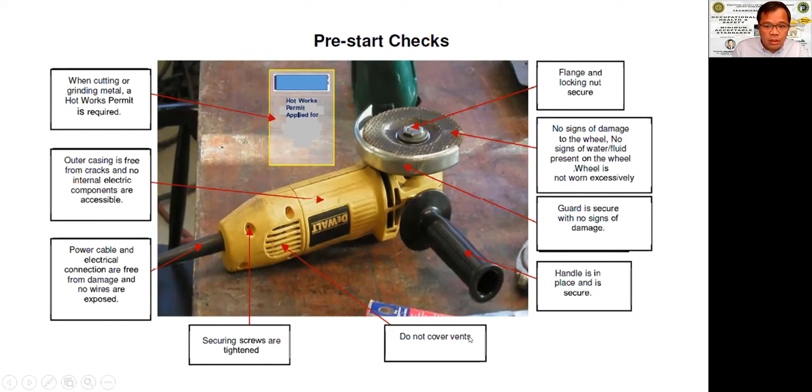Do not cover the air vent. Okay. Disc selection and fitting - so you can see your power tools.

There is an example here in the photograph - 10,000 revolution per minute. Okay, so you need to use more than 10,000. So for example here on the side 8,000 RPM, so you cannot use it on the 10,000. But 13,300 RPM you can use on the 10,000. So this RPM should always be higher than the machine RPM.

That is our code, no? Only use the correct tools for fitting the disc, so you can fit it properly. If the disc is marked with a rotation arrow, always match it to the arrow embossed on the power tools. There is a power tools arrow and the disc arrow as well, so you should match them.

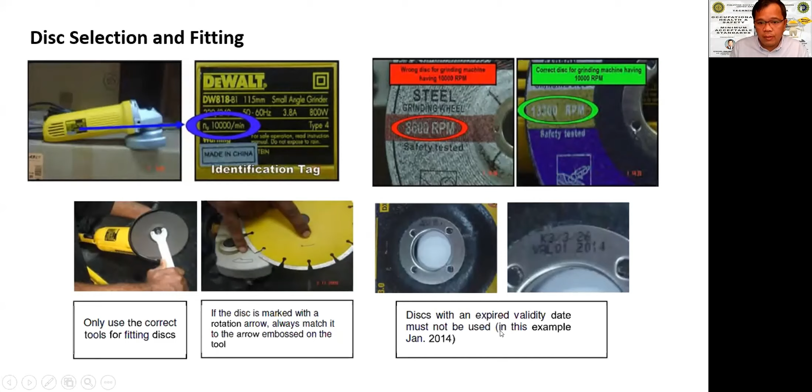Expiry date, as I told, you need to check. Handling and use - this is how you use the power tools. Always use the correct grip, rotation of the disc. Sparks produced are thrown away from your body. In this position of the photographs, the guard must be kept between the operator and the disc.

Because even though this is made by a highly reputable manufacturing company, there is always some percentage unsafe - 0.0009. So there is no 100% safe. So always follow the safe procedures.

Okay guys, so we have done the abrasive wheels. Let us continue, we are running out of time.

Hot works, minimum requirements. This MAS is aimed to control workplace hazards and protect employees and the environment. Hot works is any activity which involves naked flame, welding, brazing, flame cutting, the use of blow lamps, or any other process or equipment which produces sparks. Cutting or grinding is called hot works.

General requirements: permit must only be issued in advance for a specific job, for a specific time frame, to a specific person. It's not 24 hours your permit - they will mention only the time frame that you will do the job. The time period must be for one working shift, but must never exceed 24 hours.

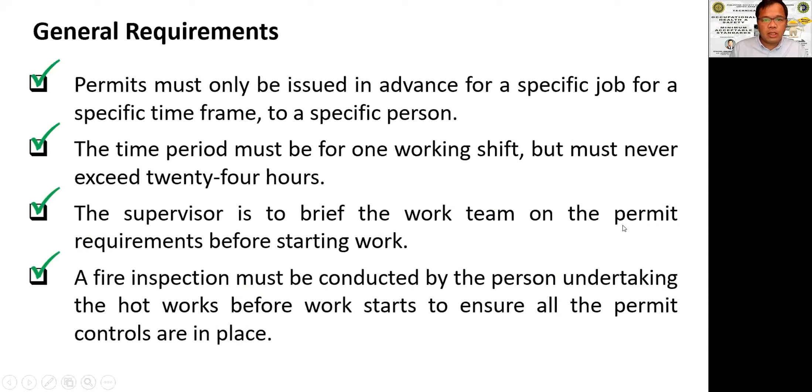Fire watch personnel must be present at the hot work location, trained to use firefighting equipment, and must be aware of how to report emergencies and the site's emergency evacuation procedures. So when you are doing hot works, not only one person - you should have one fire watchman, and he is trained for firefighting and knows where to report in case of emergency.

Permits are to be signed off only when the work has finished, after 60 minutes. There are fires that are very slow to become visible. That's why when you complete the job, you cannot just leave the place - you need to wait for 60 minutes or 1 hour.

And watch your area before you can leave that place and close your permit. Because the fire, as I told, is very slow, especially if the fire is because of treated materials - it will spread slowly, but there is still fire.

How hot work area - sir, excuse me sir. How long will it take for you, sir, for your presentation before our open forum? I think - how much more time do you need, sir, for the open forum? Okay wait a minute, I will just check.

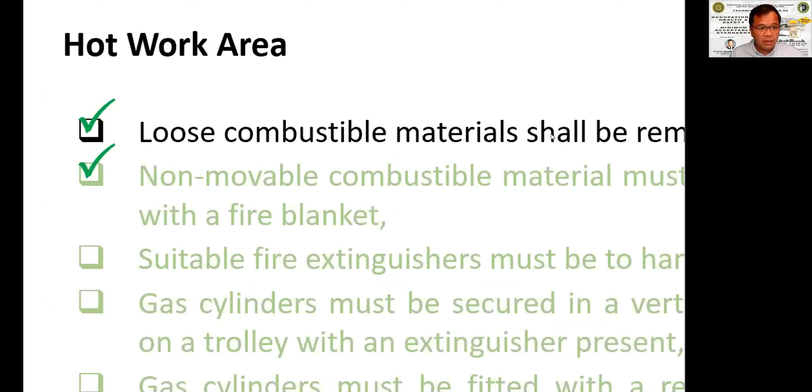We have so many more. If you want, I will cut this presentation up to mobile scaffold only, no? Yeah, we can start wrapping up, sir, for the open forum. Yeah, if it's okay, it's possible for you to summarize some of the presentations. Thank you sir, thank you.

Okay, all right. So hot work area - loose combustible materials should be removed, and non-movable combustible materials must be covered with a fire blanket.

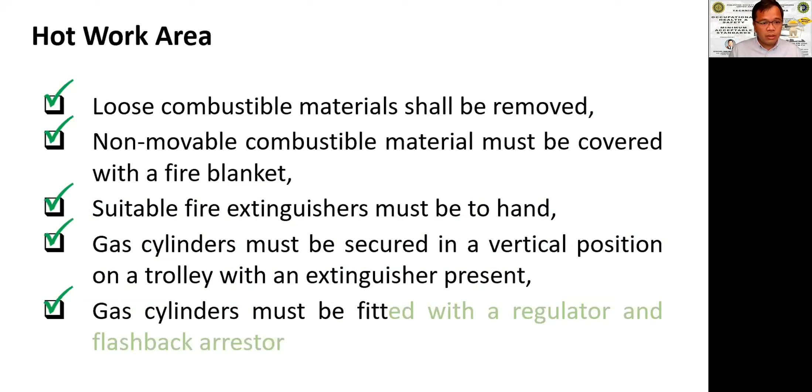Like for example, you bring to your site the right good materials, like machines covered with combustible materials such as timbers, so they cannot be moved easily - you need to provide a fire blanket or cover it. Suitable fire extinguisher must be on hand. Gas cylinder must be secured in a vertical position, as I discussed a while ago. Gas cylinder must be fitted with the flashback arrestor regulator.

Other personnel who may be affected by the work must vacate the work area. If they are not involved on the job, they should leave that place. I already discussed it suitably.

Use a spark box and keep cutting in high-risk areas. A spark box is like an enclosed area that you can contain your sparks in. The opposite side of the wall shall also be checked and combustibles moved away. Hot work permit must be displayed at the work area, and welding screens and warning signs erected when hot work is being carried out in high traffic, congested areas.

I think... hello, sir. Sir Ryan, yes sir, yes sir. I think we will cut if we have a chance in the future again, then we will continue from there. Because yes, we have... I cannot cut the minimum acceptable standards. That's why I put all of this here so that everybody can understand. Because mostly this minimum acceptable standard is for PME, so that's why I prepared to complete this. It's all right, so okay sir, for the moment let us stop here.

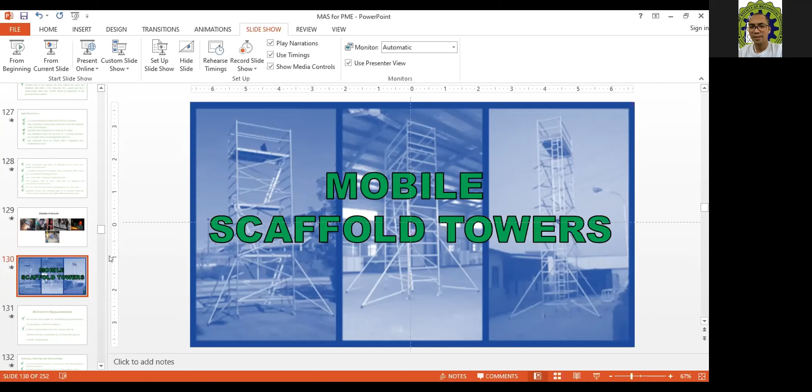We have a few questions here sir. Coming from our Past President Francis Uy: how about PAT testing? Are these records supposed to be checked by the safety officer and monitored by contractors?

PAT testing should be checked by the electrical engineers. The safety officer is not the one doing it, but the safety officer is to monitor this, if they are doing it. Okay, sir.

Another question, sir, coming from me: what are the metrics used to measure safety performance on a job site or a project?

We have an audit system now. If you are conducting an audit, you have a grading system there, whether you are complying or not complying. In safety, even as an example, the high mark is 5 and you get 3 - that means there are still areas for improvement. In health and safety, because we are protecting life and the projects, we need to make it at least to the maximum score. So we are doing this metrics during the audit.